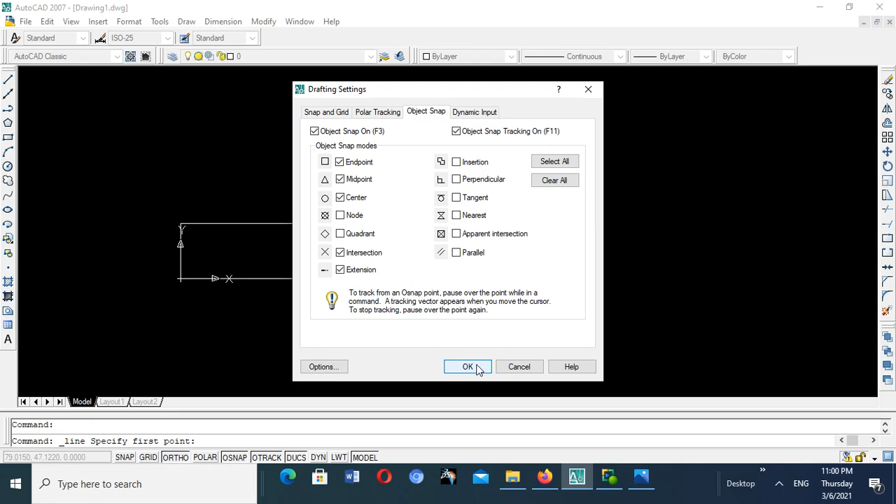So out I come. If I now try and draw a line and just indicate the position of the line roughly, it will indicate where the midpoint is. So there is my midpoint. I draw my vertical line. Then I right click and say enter.

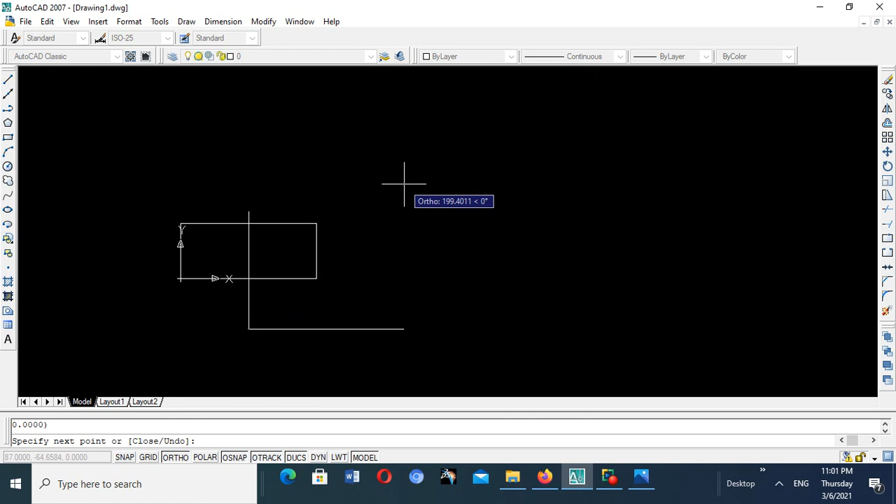Then I want to draw this box as I have said, this rectangle. So it is 46 in width and it is 78 overall. That means it goes 4 on that side, 4 on that side extra. Good, so I go to my AutoCAD.

So the 46 side, that means 23 per side. So I can now use this modification bar which says offset, specify offset distance. Since it's 46, I offset by 23, then I say enter. It says select object to offset. I want to offset this line. It says specify a side to offset.

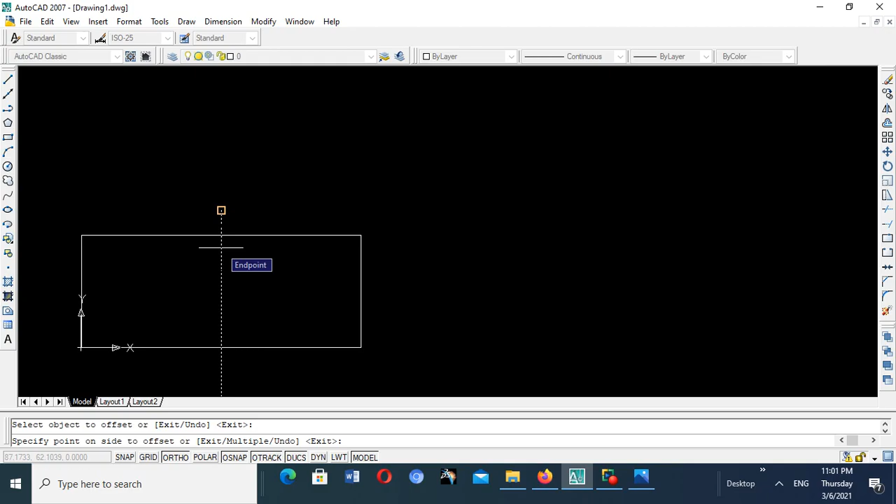I want to offset it this side. Then again I click offset and offset to this side. So you realize now I've created two lines. If you measure the distance from this point to that point, it is 46, because I was offsetting 23 per side.

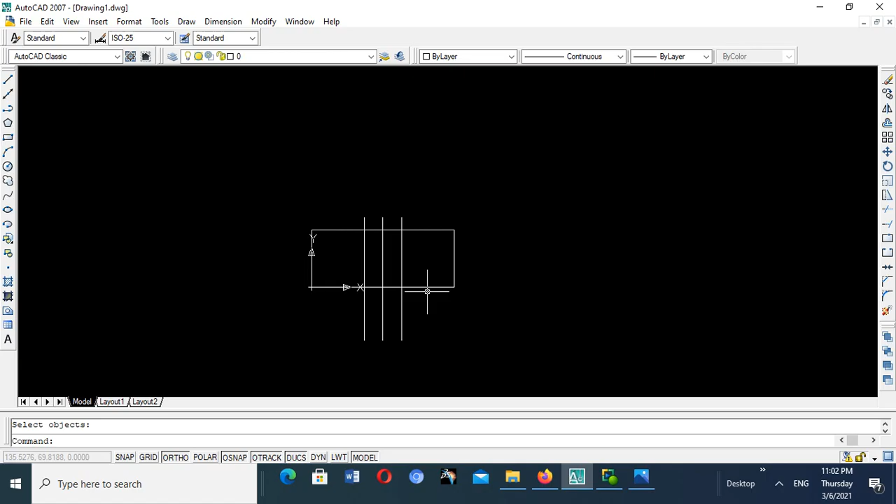Then I want to explode this rectangle in order to offset this line 4 per side, 4 per side. So I click the command explode, then it says select object, I select this object, then press enter. By that time it is exploded. Remember, it was unity, it was one entity.

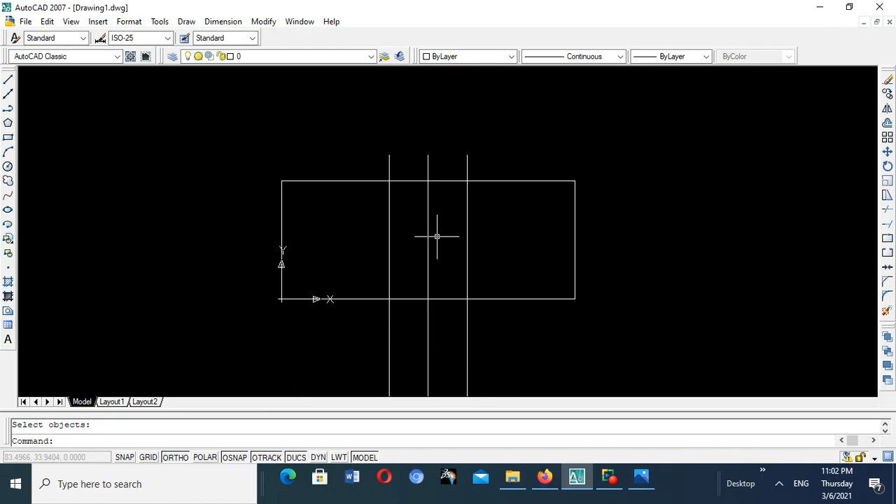So I want to draw this line which is 78, 70, that means it's 4 per side, 4 per side, 4 per side. So I come to AutoCAD and zoom it to a convenient position.

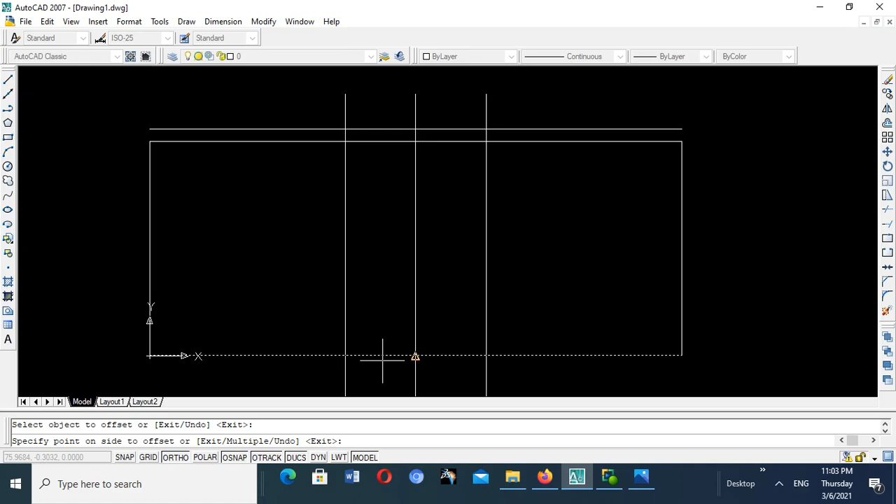So what do I do? I go to offset again, it's a very useful tool. Offset, specify offset distance 4, enter. Select object to offset, this one, specify side, that side, 4. Then again in the same command, specify this and then that side. So now it is 4.

So I've now managed to draw that line and that line and that outer line and that outer line. I come back to my AutoCAD again. So what am I saying? I don't need these outer lines, don't need this outer line.

Yesterday I taught you how to trim, if you remember, or that video I just sent to you tonight on your Google Classroom email. Today I want to teach you a shortcut for multi-trimming of unnecessary lines.

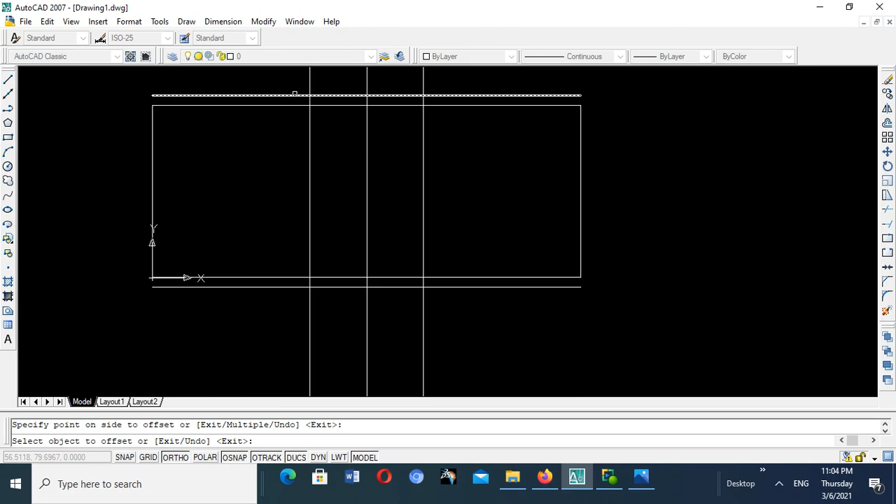So you go to your keyboard, you type TR, you check here, type TR for trim. Then you go to the key enter, click it twice, enter. That's the shortcut for multi-trimming. Now I can click anything and it will be trimmed.

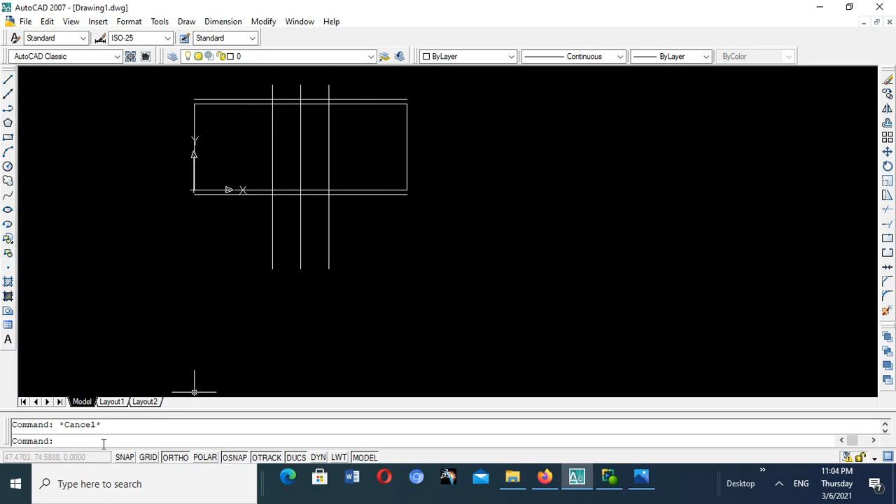Check this, that is good. Oh no, let me start again. The command TR and enter. Then start clicking and see, that is gone, that is taken up because of that short command. You could use the other command I taught you yesterday, but this one is a shortcut command. You must know these shortcut commands.

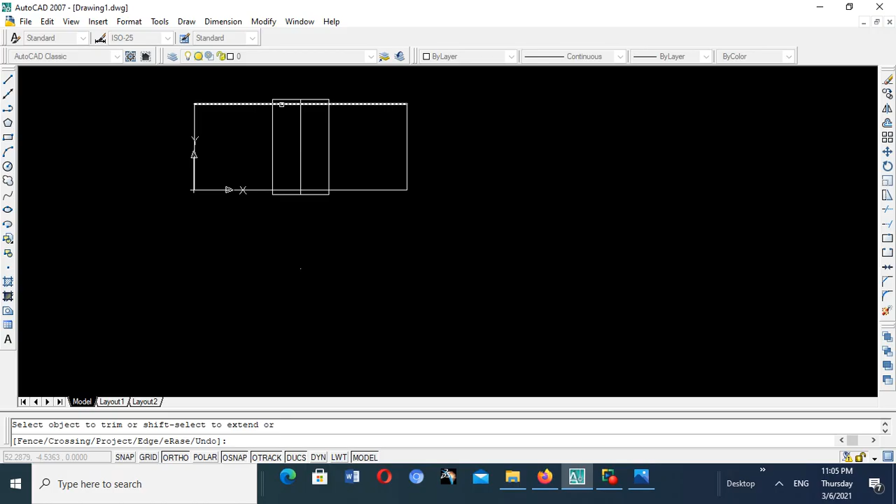There is the rectangle. This line is also not wanted. This line also not wanted. So there is your middle rectangle. Check, that's how it is, isn't it?

Then there is this line here. Check it, these two lines. They show some hidden detail of the upper side which I did not indicate. It's not part of our learning.

So if I want to draw this line, their measurement, if I check with the upper part, they are 26 apart, that means they are 13 per side. So I can offset this middle line 13 per side to make this 26.

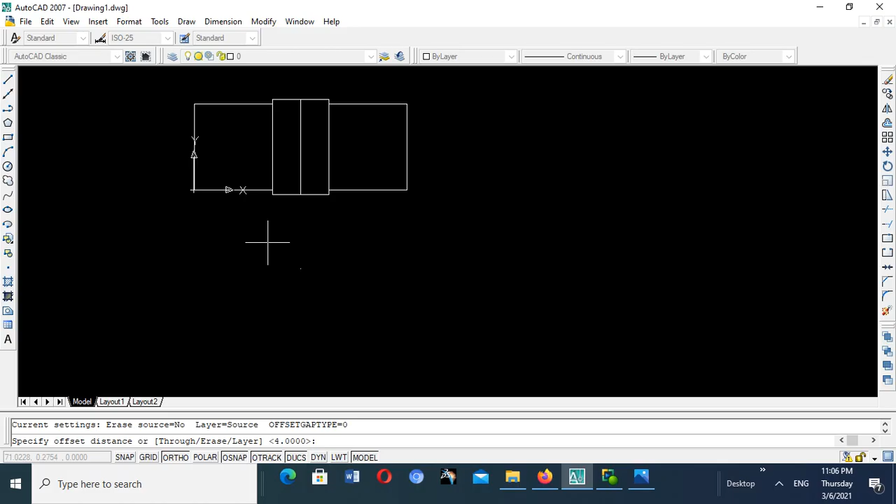So I go to AutoCAD. It's my middle line. I go again to command offset, AutoCAD is very interesting. Then specify offset distance, what is it? 13. Then I say enter.

Then it says select object to offset, it's conversational. Then I go, this is the offset side, this side. Then I go, this is to offset, then I go this side. Then there are my two lines.

Check them, these two lines, this one and this one. Good. Then I've got these three circles, 1, 2, 3 circles. So I want to draw all of them one at a time.

The first one is diameter 12. The second one is diameter, it might not be indicated there, but it's diameter 40. The third one is diameter 60.

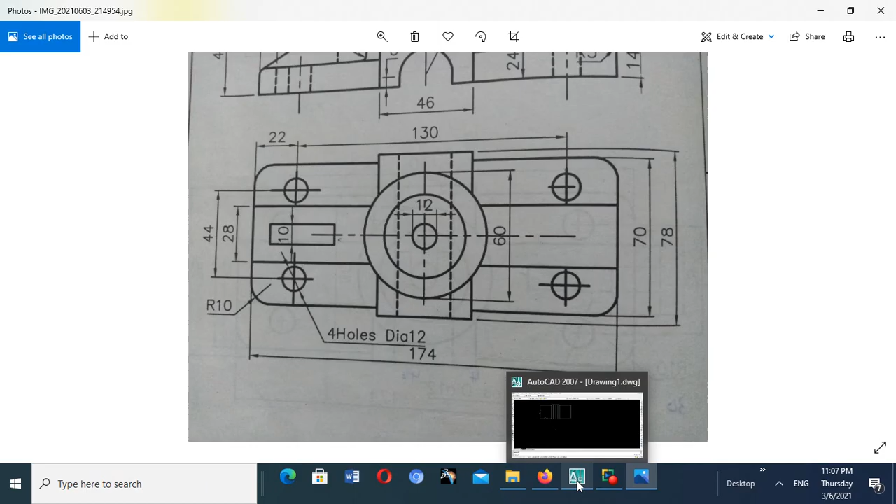So I just go to my AutoCAD. Here there is no middle line, so I can sketch it, I will remove it later. Check, pick it there, and I draw. Then I right click and say enter, or I just press the key escape.

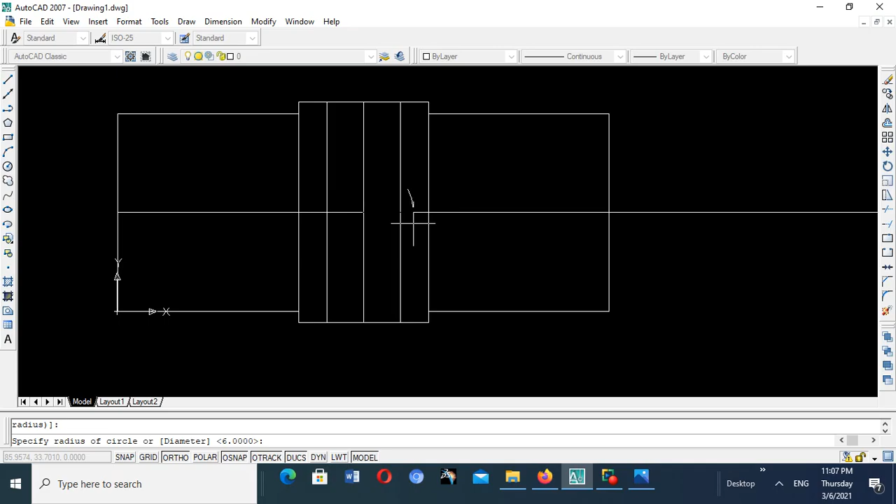There is my middle line. So I go to circle, click the midpoint. The first one is diameter 12. Am I right? Let me check. Yeah, diameter 12. Go to my AutoCAD.

So it says specify the radius of circle or diameter. So we specify radius, so 6 is there. Then we say enter. Then our next circle, check.

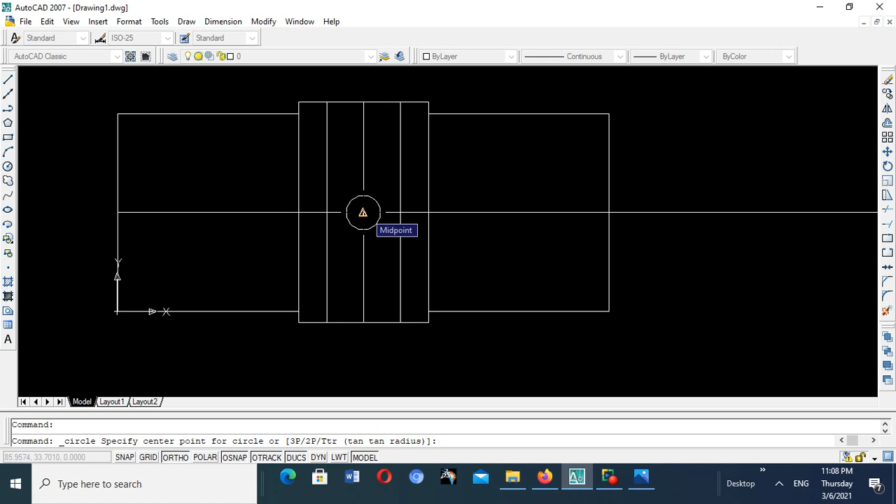That's the one I said 40. So we come to AutoCAD again, we click circle, then we click the middle, the center. And then we want to change now, the diameter there is 40, means radius is 20. So we go, there is our second circle.

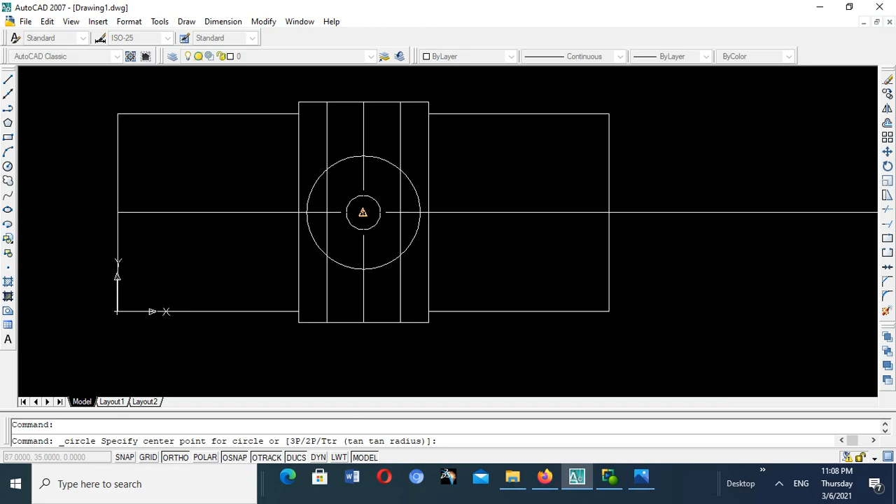Then third circle, let's check, the diameter is 60. So we click on AutoCAD again, and then we want to draw a circle, and then we go in the middle, and our diameter is 60.

That means our radius is 30. There we are, 3 circles we have drawn. First one 12, second one 40, third one 60, as you can see.

Then you realize some of the lines are supposed to be trimmed. Like this line is supposed to be trimmed, this line is supposed to be trimmed, this line is supposed to be changed - the line type, to show hidden detail. So we can go ahead and do that.

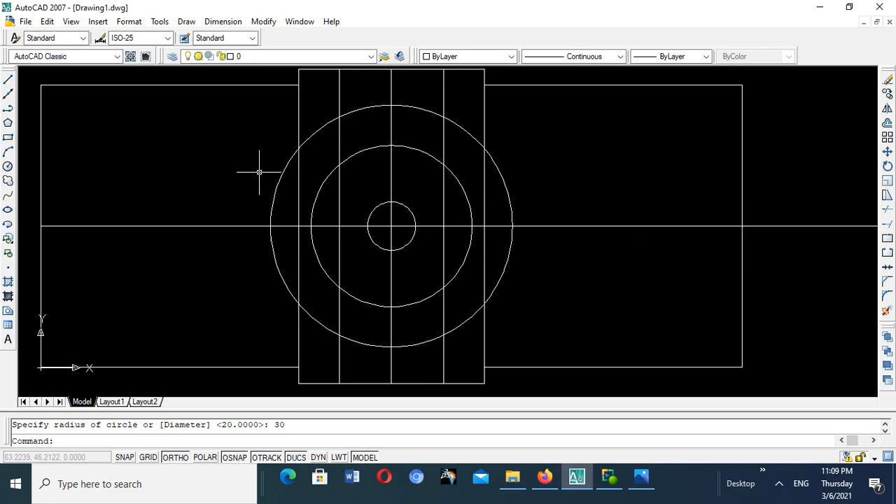So let's first trim this unwanted line. We go to our AutoCAD. The short command for trimming is TR and enter. Then trim that one - it's not wanted. Again trim that one, and trim that one, and trim that one. So we have done this part. These are trimmed, right?

Then we will leave that for now. Good. Then next, we are progressing, isn't it? Check. Next, what do you want to do?

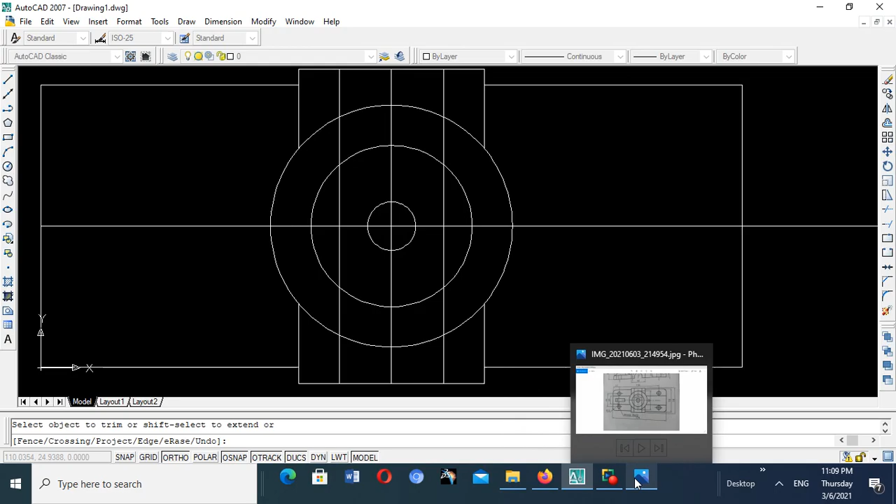We want to draw these lines which are 28 apart, centrally located in this rectangle. So we take this line and offset it 14, making them 28 apart. We go to AutoCAD, take this line, go to offset command, specify offset distance 14, enter. Select object, this one, side this; select object, this, side that. Check, we've managed to draw our two lines, right?

Right, so you realize these lines again, some of it are supposed to be trimmed. They are supposed to only come out from the outside of the circle - that's where they are supposed to appear. Inside there, they are not supposed to appear.

So we go and trim them. I already taught you the short command. Go TR, press enter twice, enter. Then we come trim - sorry, it hasn't been done properly. We go TR, press enter. Then we go there, trim, we go there, trim, we go there, trim, we go there, trim. Then this one and this one, we don't need to trim them.

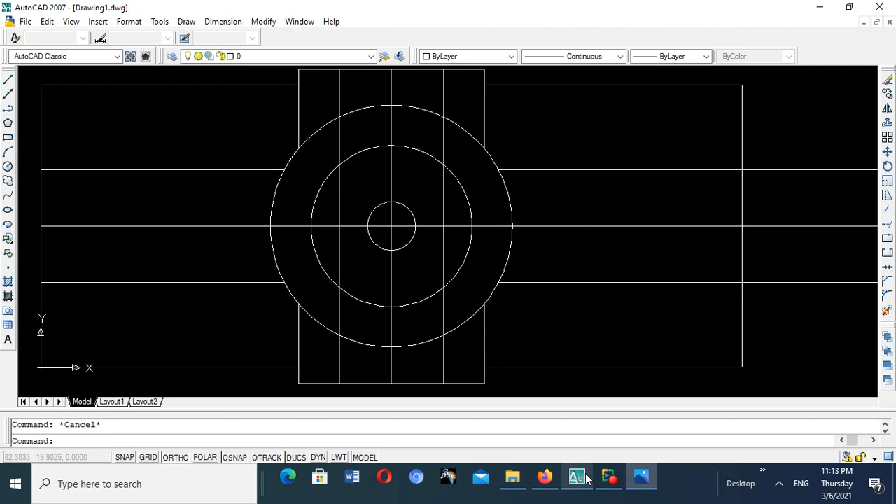So check, so I go circle. Let me check the radius - the diameter is 12 like the other mid one. So if I go 4 holes, diameter 12, right? So we go to AutoCAD, then we submit.

Oh, by the way, we didn't trim these lines, we don't need them. So we go TR and enter. So we trim this guy, trim this guy, trim this guy, we don't require. So we go back, we could press escape to come out of the command. So we go to our circle, this one.

Where we agreed it is 22 in the x direction and it's 13 up, because we said 70 minus 44 to make 26, divided by 2 to make it 13. So it is 13 there, 13 there. So it means my coordinates, the center of the circle is 22... 13 in y, correct?

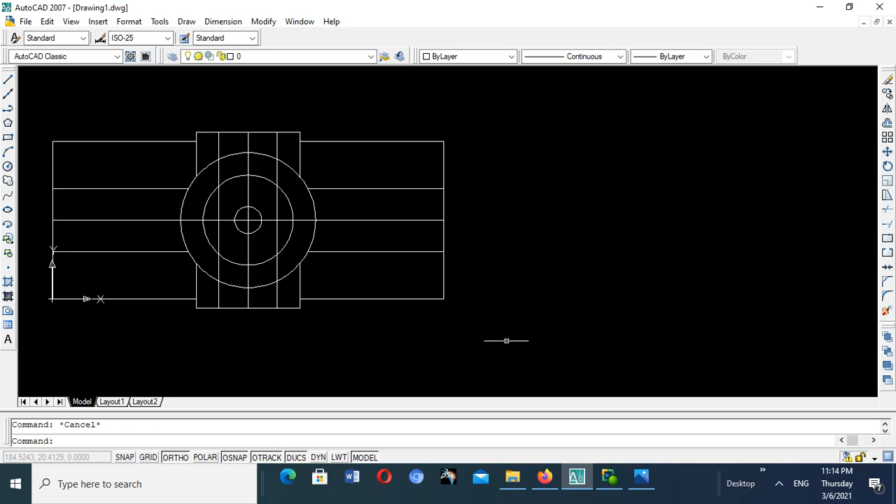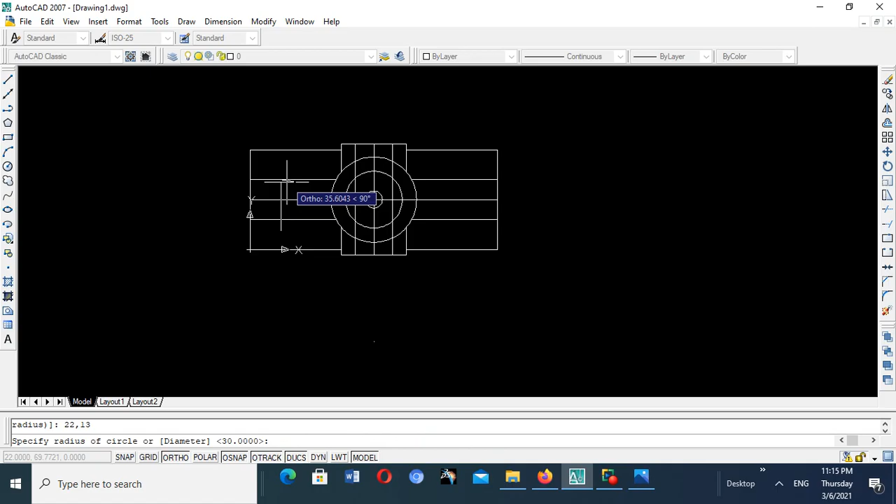So we go - we say we want to draw a circle. We click circle. Then it says specify center of circle. So we click here, we agreed it is 22, 13 in Y, so we say enter. There is the center of your circle. So the next thing is the radius - our radius is 6, so it was 6. There is our circle, which is this circle here.

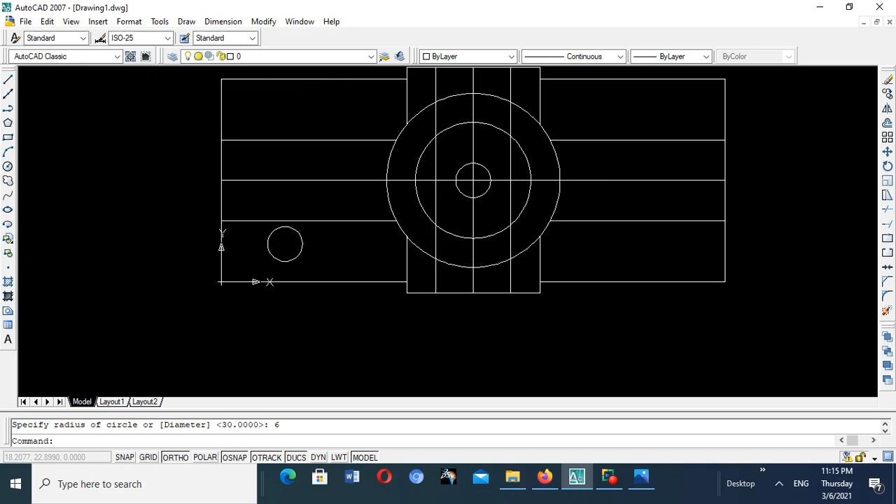Now we go back to our AutoCAD. These other three circles, we won't draw them, we just mirror. If you were doing manual drawing, you would have to take your compass again and locate the center of each one and draw it. That's why we encourage CAD students to learn these softwares, because as a modeling engineer you need to be faster and go according to the times.

So we take this circle of ours and mirror it. We go to the mirror command, press mirror. It says select object, I select this object, then enter. Then it says specify first point of mirror line - this is the mirror line, first point, second point. It asks if I want to erase the source object - no, by default. I press enter, and there is my second circle, produced by mirroring without drawing it myself.

And this one and this one, I will produce them by mirroring this one and this one. So let's go for it.

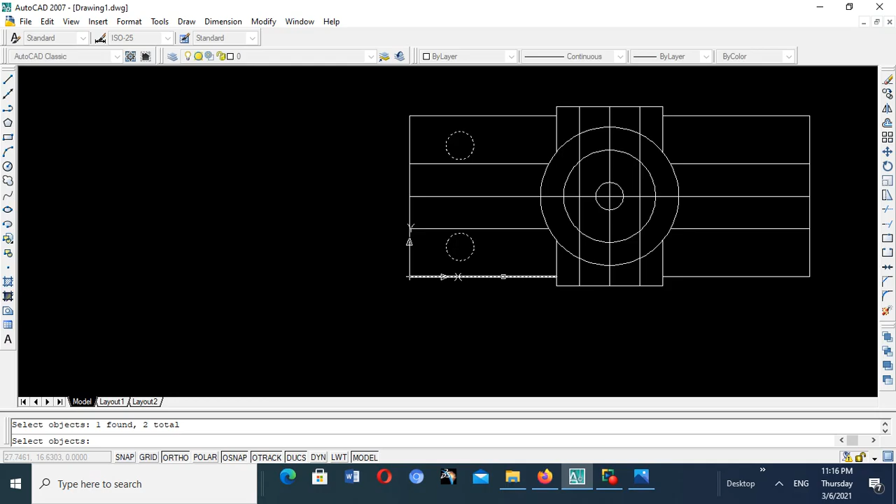I press mirror again. Select objects, this object and that object - I want to mirror them. It says select objects, 1 found, 2 total. Then I press enter. It says specify mirror line - this is my mirror line, first point, second point. Enter. There are my circles, 4 of them, no need to draw them. That's the good part of computer-aided drafting.

Then we go ahead now. Let's check our drawing there. We have got this guy here who is 10 by 33 - the 33 is from above, you might not see it. So he is located, the distance from there to there is 9, then from there to there it is 10. So what do I do? I just go to my AutoCAD.

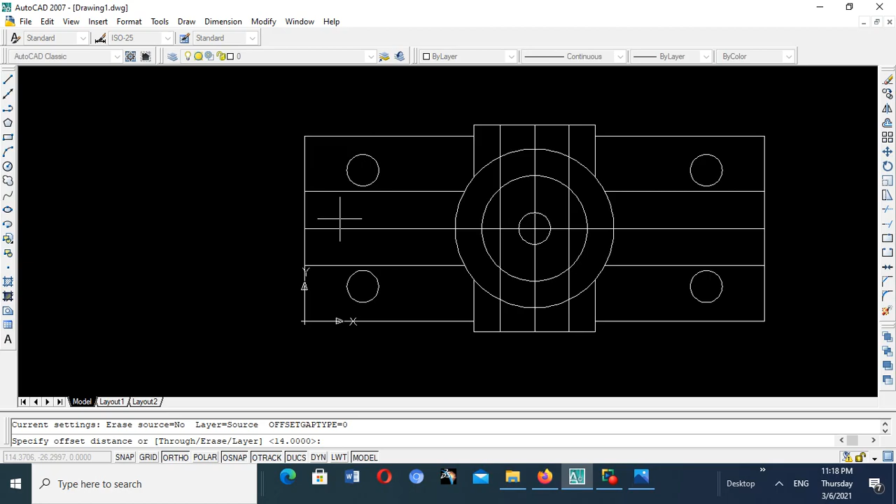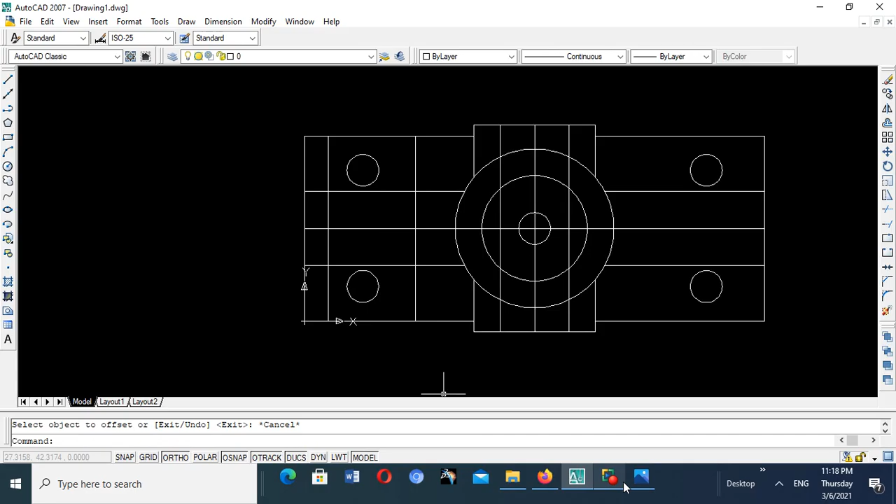I offset this line here. So I go offset, specify distance 9, specify object - this object, specify side - this side. That command is done, I press escape. Then I want to offset it to 33, as I've said. Offset again, specify offset distance 33, object, this object, side, this side, enter. So I've drawn these two lines, this line and that line.

Then this width is 10, so I go to AutoCAD again. Offset command, specify offset distance 5, select object to offset this side, that object to offset this side. There you are. Then I press escape because I finished, I come out of the command.

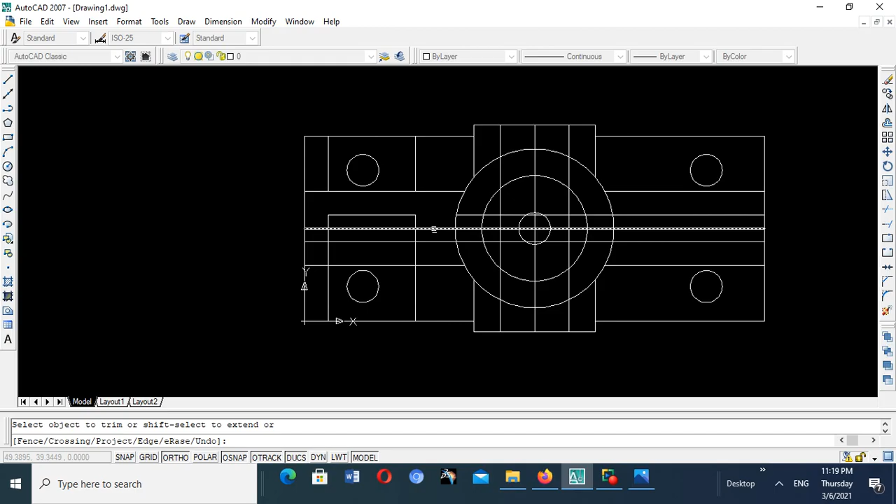Now I want to trim. I told you already the short command for trim is TR and enter. Then you just go to the lines you don't want - you just click it, it's gone. Click it, it's gone. Click all of them one by one, it's gone, because we are in the command of multiple trim.

Then this one I also don't want - no, this one I cannot trim because it's not interfering with the line, so I escape and just click it and delete. So I do this to this one too - click delete, click delete, click delete, using the left mouse button. There you are, the rectangle is there.

You check this one - 33 by 10. What is left? These fillets. We are almost there, isn't it? Nice.

So your fillets, what do they do, how do you produce a fillet? Let's go to AutoCAD - our fillet radius is 10. So we bring up our AutoCAD, we want to fillet this corner. So we press fillet, and it says indicate the radius. If we did not want 10, we would change it here and put say 12 or any figure.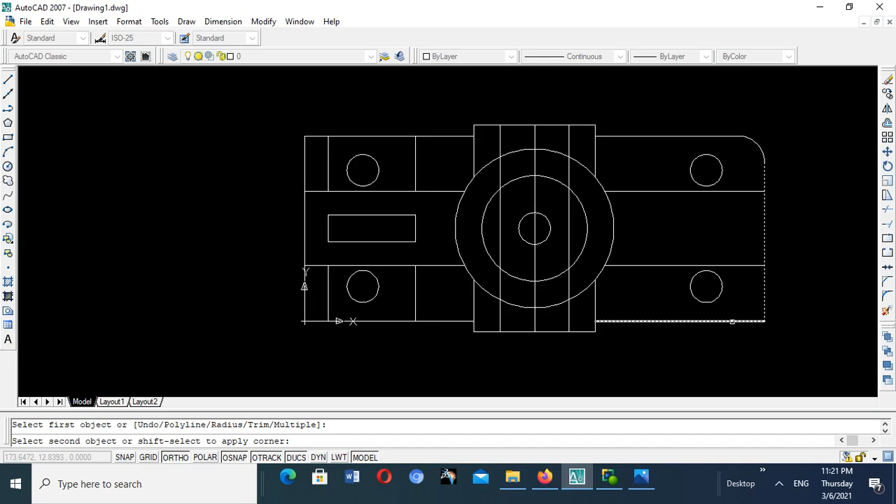Because 10 is their default, it says select first object - this is the first object, sorry - and select second object, this is the second object. There is my fillet. Then you escape, take the command fillet again, select first object again, second object again - there is my fillet. Nice.

You love AutoCAD. Escape. This line we don't want, I'm sure we don't want it - it came from these other lines we don't want. You can delete them - you delete this one, you highlight and delete this one, you click it and delete.

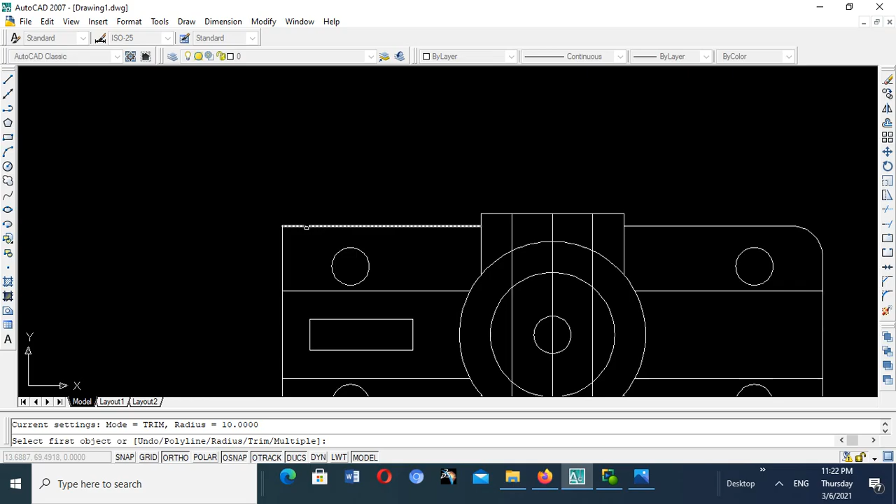Then what else, we want to continue filleting. So we go to the fillet command, our radius is already there. We click the first, click the second, there is our fillet. We escape, click fillet again. If it was chamfer we would just click chamfer here, but now it's fillet, so we fillet there and fillet there. There is our fillet, check - we're almost home and dry, isn't it?

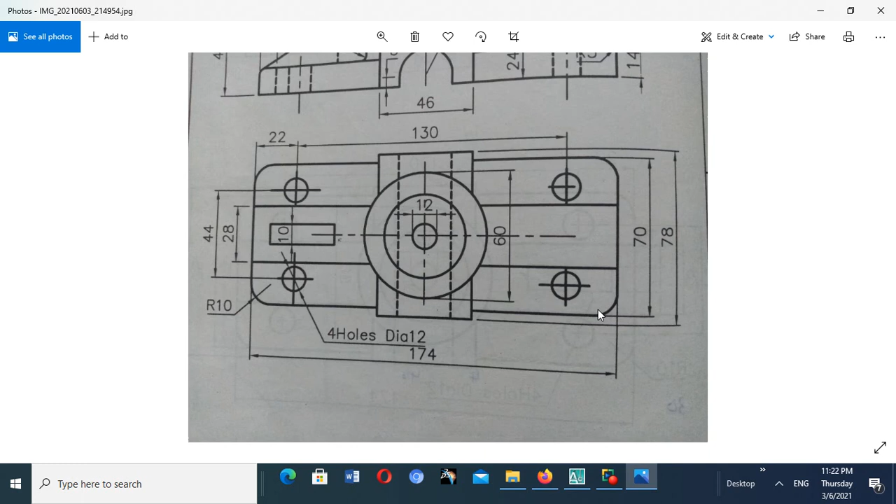Check our object there. The only thing left now is to change those line types so that they become hidden detail. So we come here, we want to choose a hidden detail line. To find it, these types of lines I will teach you later - selection of lines. We might just take a line, maybe this one, hidden.

See, hidden 1, hidden 2, hidden 3. So choose this one. We click our line here and say enter. So hidden. Let's go again to hidden. We click that line, come here and choose hidden, and say enter. It will become a hidden line.

Same thing with that one. We say enter, enter, escape. We choose that one and go - sorry, we don't need that. We come to the line types and choose hidden. It will become a hidden line. We press escape. See, it's now hidden.

This we don't need at the moment, we'll talk about it later. So check now, here is our profile.

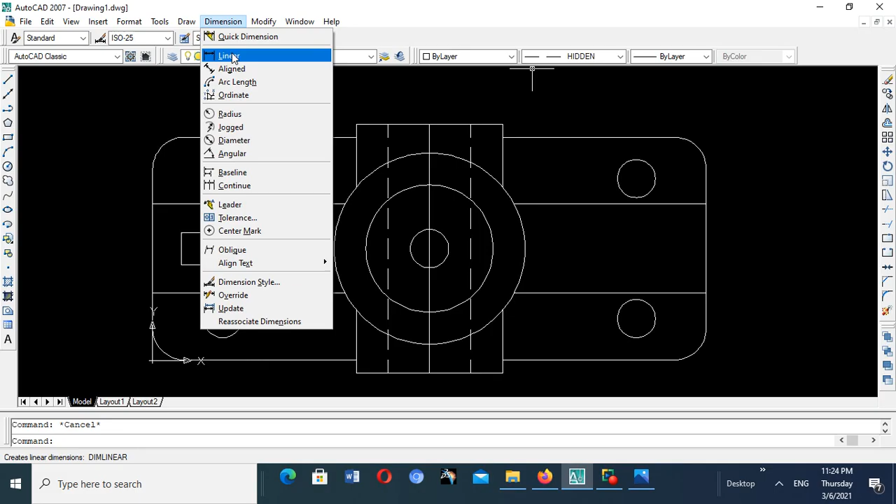So they say click first extension line. We want to dimension how long this rectangle of ours is - 174. Because of the line type, it is appearing, so we want it to go continuous. We don't want it to go right on this one. We enter.

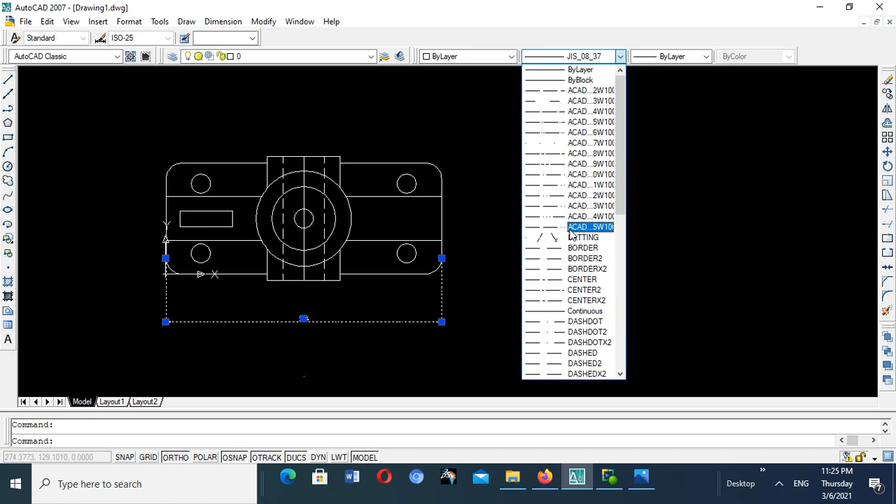Sorry, let me do it for you. Right, line type - the one I want is this one, continuous. This one, right? There is your dimension.

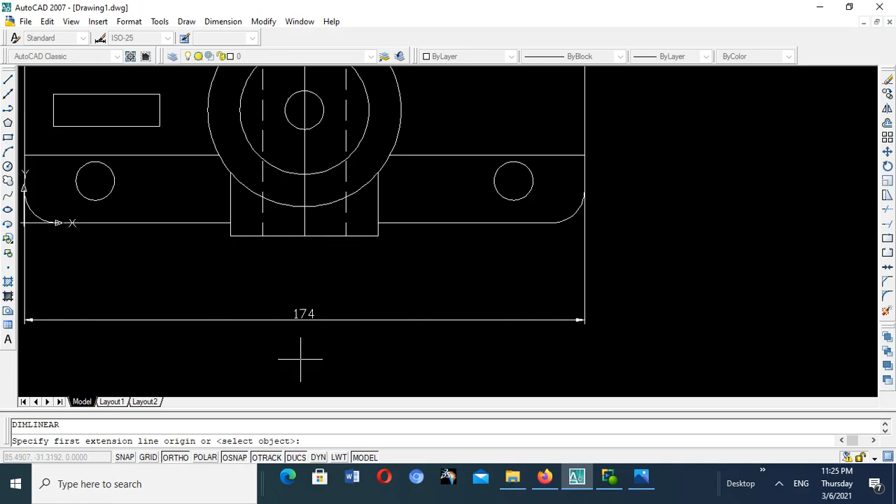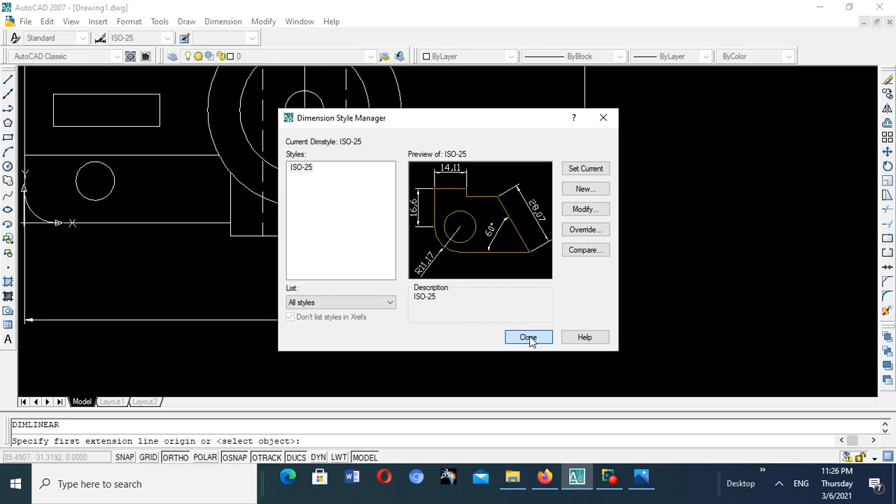We'll talk about changing the dimension arrows, the size of the arrows, the size of the dimension, instead of the position - some want it below, some above, some vertical. You can change this: modify, sorry, dimension style, and this box comes and you can do a lot of alterations here that we'll talk about later. Close. So we dimension, escape.

So we dimension the other rectangle, we go dimension linear, you click here. It's 70, we can drag it. Don't want it to appear inside, drag it and place it outside. If you are dragging a dimension, you highlight it and click the middle point and drag using your left mouse button, position it where you want. There you are - so we've dimensioned our width, dimensioned our length overall.

So you can dimension anything you want. You want to dimension a radius, come to radius, your circle, position it where you want, escape. Then the dimension of your arc - no, not arc length, sorry, this is the arc length. You want to dimension the radius of the arc: dim radius, select arc, this is arc, want to dimension 10, there is your arc, right?

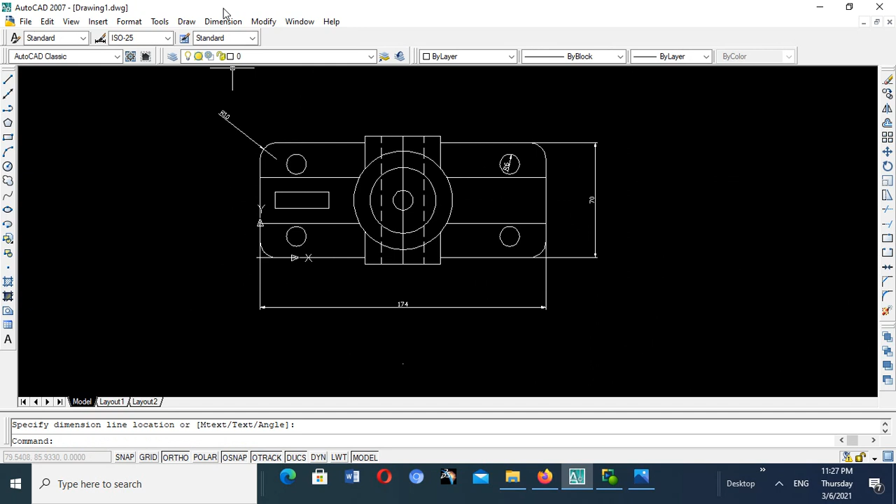Anything you can dimension, linear - want to dimension that rectangle, there is 46. You want to dimension what else, you practice dimension from there, and then you want to dimension those circles, radius of the circle, just put there and set. So that's generally how you place your dimensions.

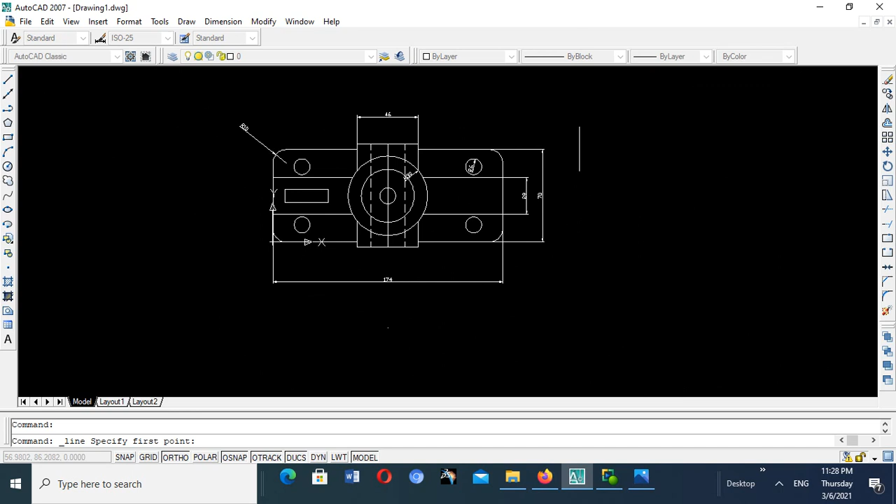If your line was inclined, like you remove ortho, put a line and press enter - you want to dimension this line, because it's inclined, so you go to aligned and click there so it will pick the aligned. But if you just go on linear and want to dimension this line, check what will happen - you see, to take the linear dimension, right? So that's good learning.

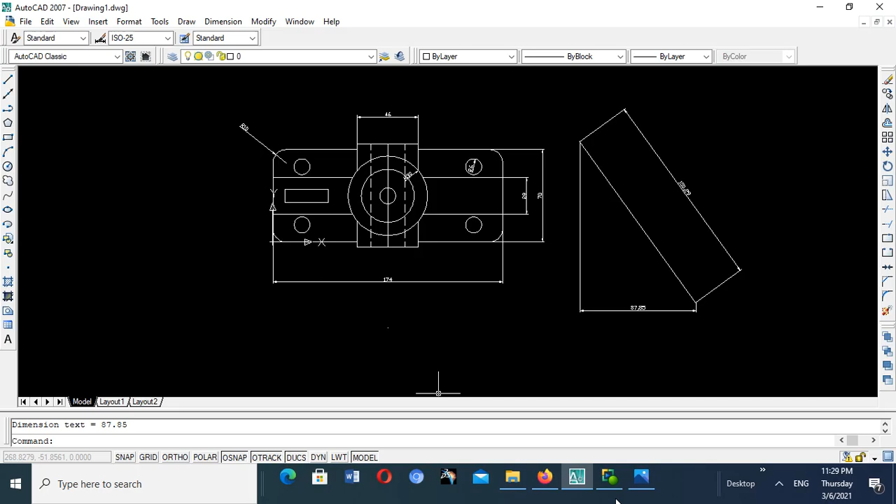And then you practice. I will give you more shapes so that you practice, right? Thank you very much. Take a look at this, then I'll give you some more assignments.